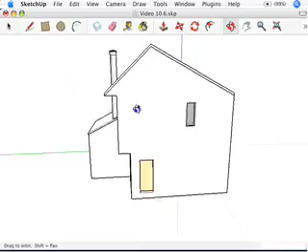Okay, a section in SketchUp is kind of an interesting thing. There's nothing that really exists like a section in real life, but sections are incredibly important tools for you to be able to get inside, basically look inside or cut away part of the thing that you're actually building. And people use sections both to work on the inside of things, and they use sections to show the inside of things or hide parts of things from their audience when they're presenting. So without further ado, let's talk about sections.

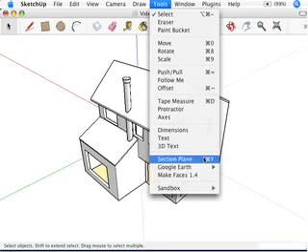Okay, to create a section, all I have to do is go to the Tool menu and choose Section Plane right there. When I choose Section Plane, I get this big funny cursor. You notice how it's this giant green rectangle? Actually, I guess it's kind of a square. It's actually going to change shape. Right now that it's kind of loose, it's a square, but you'll see that it kind of turns into a big rectangle after I place it.

Now, what I'm doing here is I'm just dragging this green rectangle thing around the model, and it's kind of snapping to different planes. Notice how when it's on this slanted roof, it's actually slanted itself. Down here it's also slanted. Over here on this wall it's kind of facing off to the left. On this wall it's sort of facing off to the right. And if I hover over this round chimney thing, you see how it's kind of spinning? Because it's always facing the surface that you have it hovering on.

Okay, ready? This is going to be quick. I'm going to cut a section on this side of my house. Watch what I'm going to do. I'm just going to click. And what I've done is I've created this big giant section plane. See how it's a big kind of orange rectangle like I said it would be? And the end of my building's gone, just like that.

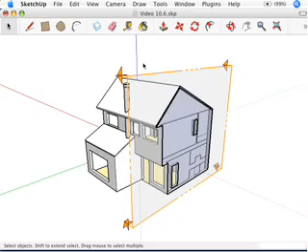This end of the building's gone. I'm going to grab the Move tool at this point, because what I want to do is move this section plane. I'm going to click on it and then just move it. And you notice what's happening? You see how part of my model is being cut into with that section plane right there? Now, the important thing to realize is it's not actually disappearing. If I move this out of the way, I've still got the house there.

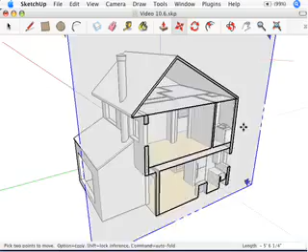But let's zoom in some, just like this. As I move this section plane back and forth, I'm actually cutting through the house as I move through here. Okay, it's a pretty important concept to understand. Let's get it to a good spot. That's kind of a good spot, sort of through a doorway. There we go. And there's my section plane.

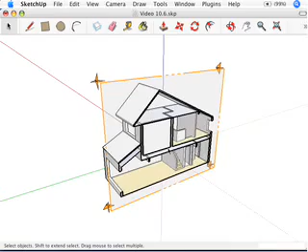What I've done is I've actually placed that section plane. This is kind of an object in SketchUp. It's kind of a strange thing. It's an entity, sort of like a guide or an edge or a face is, but it's what I would call a construction entity. It's not part of your model. It's kind of a thing that you place in your model to help you model and show off your model, if that makes any sense.

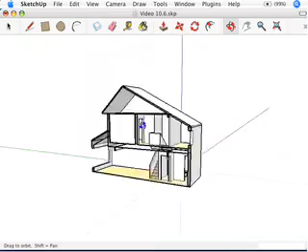Okay, once we've got that section plane on there, it's kind of ugly, so what I want to do is hide that section plane. What I'll do is go up to the View menu and deselect Section Planes there. So what I don't want to be able to see is the section plane that I just created. What I do want to be able to see is what's called the section cut, which is the cut that the section plane created. I hope that makes sense.

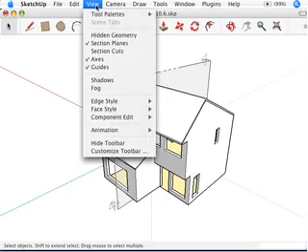If I go up to the View menu and deselect Section Cuts, the cut actually goes away. And then if I go to View and say Section Planes, now I can see the section plane, but not actually the cut that it's producing. So using those two things in combination, you can choose to show the planes or the cuts, or no planes and cuts, or no cuts and planes.

It's kind of up to you. Okay, but the general premise is that section plane, once I've changed or placed it, it's actually creating this section cut effect right there on my model.

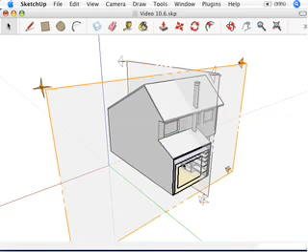Let's get another section plane. I'm going to go up to Tools, go to Section Plane, and this one I'm going to cut this way. Okay, and I'm going to use the Move tool to move it over some. Let's move it. I'm cutting through the building this way now. What I want to actually do is cut through the stairs. So there we go. Okay, now you'll notice what I have in my model is two section planes.

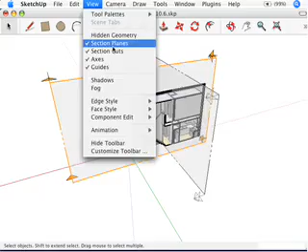I've got this one that's kind of gray and this one that's orange. And you'll notice that the gray one is no longer cutting anything. You see how it's kind of not cutting through the house? It's just sort of placed there. Now if I go up to View and say hide my section planes, they both disappear, but the active section cut is the one from the section plane that was orange, if you notice that.

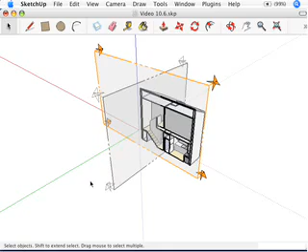Okay. You can only, in general, have one active section plane at a time in a SketchUp model. There is an exception to that, but I'm not going to go into it. Let's say I wanted this section plane, the one that's gray right now, that was cutting through the house this way. Let's say I wanted that to be my active section cut instead. I'm going to right-click on it, and I'm going to choose Active Cut from the right-click menu.

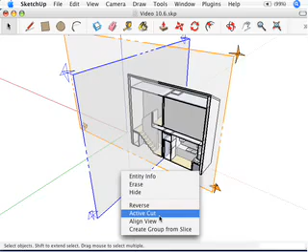And when I do that, it changes, and all of a sudden that section plane is orange and the other one is gray. Let's swap back. I'm going to say Active Cut, and so my cut is changing depending on which section plane is selected. Okay, I'm going to get rid of this section plane, I'm sorry, the second one altogether. So let's just delete that, and we're working with one section plane again.

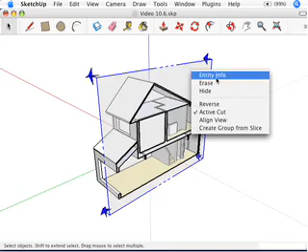Now, let's say I wanted to keep this section plane, but what I want to see is the other half of the house, the part of the house that's kind of being cut away by that right now. I don't have to create a brand new section plane. I'm just going to right-click on the existing one and go Reverse. And when I do that, it reverses the direction of the section cut, and now I'm looking at the other half of the house, the stuff that I had cut away the first time. So let's go to Reverse, and now I'm looking at that half. And it's kind of that simple.

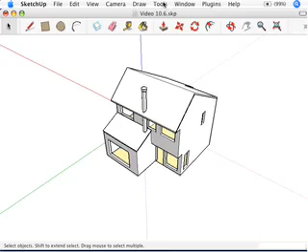Let's get rid of that section cut, and I'm going to create another kind of section cut. This is called a plan cut. So let's go to Tools. It's made in exactly the same way. I'm going to pick Section Plane, but instead of hovering anywhere on the model, I'm just going to hover on the ground so that that section cut is going to be completely flat, just like that. And then I'm going to get my Move tool to move this up 48 inches, which is 4 feet. It's kind of an architectural convention in North America to cut plans at 4 feet.

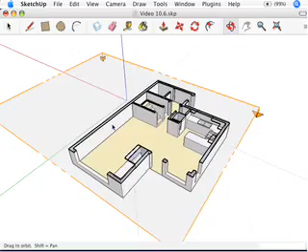Let's go up to View and Section Planes and deselect that. And now what I'm able to do is kind of see inside my house. And this is great because this is the view I would use to start throwing in furniture and stuff like that. This section cut allows me to see this floor really easily so I can kind of throw stuff in it.

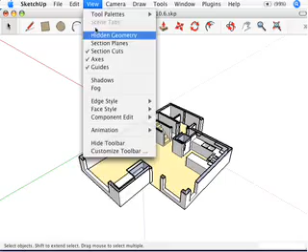If I wanted to work on, let's say, the second floor, I would show that section plane again. I grab the Move tool and just kind of move this up to the second floor like that. And maybe hide the section plane again. And now I can work on the second floor if I wanted to. I could put some furniture in here. Okay, I hope that makes sense.

Let's see if there's anything else that I forgot to cover in this section. Nope, I believe that is exactly what I wanted to talk about. Okay, that concludes the video on adding section planes to your model for Chapter 10 of Google SketchUp for Dummies.